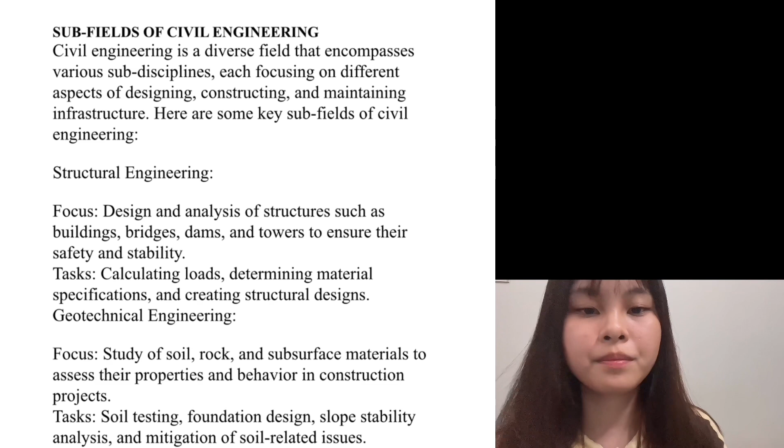Geotechnical engineering focuses on the study of soil, rock, and subsurface material to assess their properties and behavior in construction projects. Transportation engineering focuses on planning, designing, and operating transportation systems including roads, highways, railways, and airports. Water resources engineering focuses on management of water resources, including water supply, drainage, flood control, and irrigation.

Environmental engineering focuses on addressing environmental issues related to construction and infrastructure projects. Construction engineering and management focuses on project management and supervision of construction projects from inception to completion.

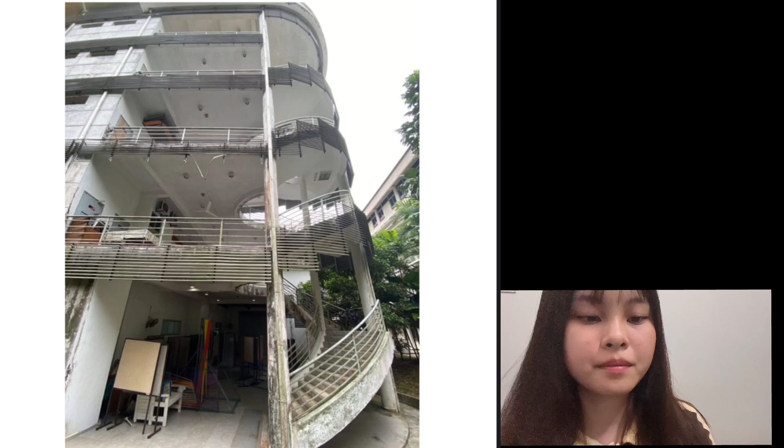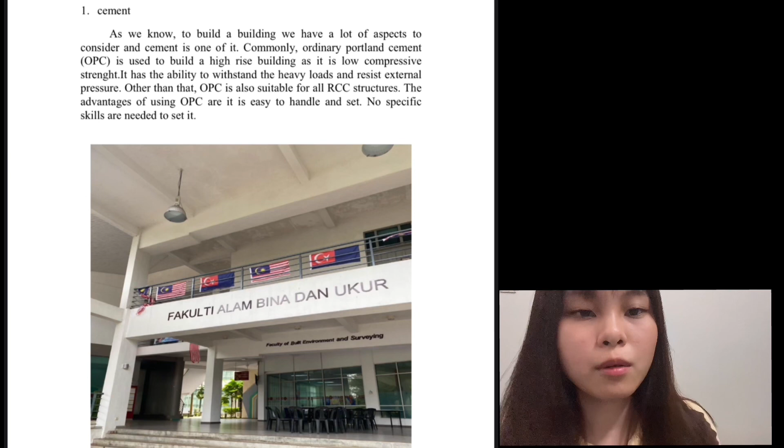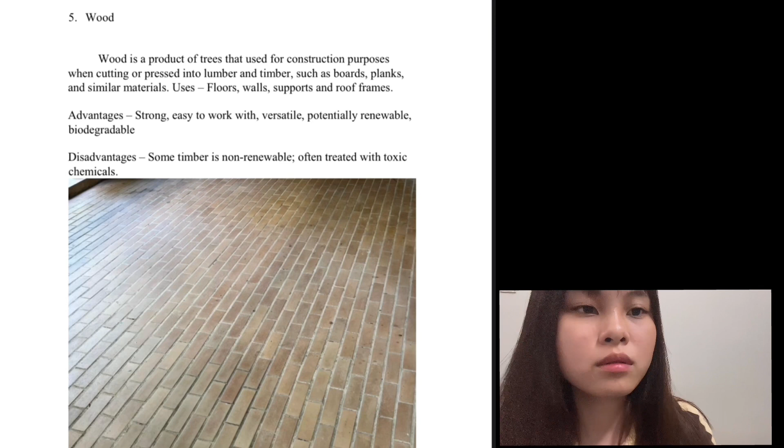The materials used in FABU are OPC (ordinary Portland cement), steel, clay type roof tiles, and glass. They also use wood for the floor, wall support, and door.

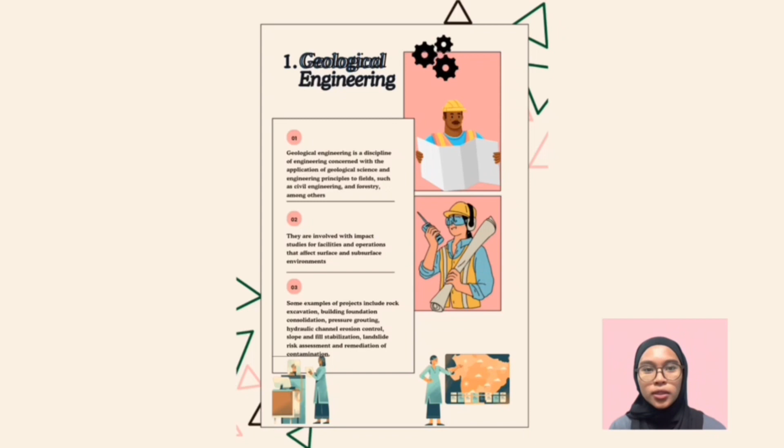For geological engineering, they are involved with impact studies for facilities and operations that affect the surface and subsurface environment, for example rock excavation, landslide risk assessment, and slope and fill stabilization. There are several problems they face in their projects, such as high rainfall and erosion, material durability, expansive soil, and tropical cyclones and wind loads.

For the second issue, geotechnical engineering, for your information, geotechnical engineering uses the principles of soil mechanics and rock mechanics to solve engineering problems. The problems related to geotechnical engineering include high temperature and humidity, seasonal rainfall and monsoons, aggressive soil and corrosion, and high groundwater table.

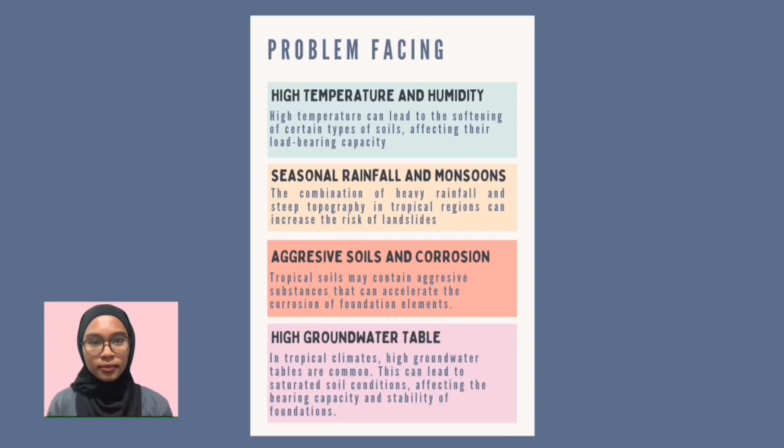The last issue is transportation engineering. Transportation engineering is a branch of civil engineering that involves the planning, design, operation, and maintenance of transportation systems to help build smart, safe, and livable communities. This field commonly faces problems such as heavy rainfall and flooding, hot and humid climate, cyclic loading from heavy rain and drying conditions, and resilience to extreme weather events.

Assalamualaikum everyone. Today I'm going to present to you about average water consumption and energy consumption during the 5 daily prayers: Subuh, Zohor, Asar, Maghrib, and Isha. With groups of people numbering 20, 25, 30, 50, and 50, we get a total of 175 people in a day.

In September we have 2,800 within 16 days, and we have 3,150 within 18 days, and we have 3,150 in November within 18 days.

Then the data for water consumption in Surau over 3 months: in month 9 we get a water consumption of 14 meter cube, amounting to 8 ringgit 10 cents; in month 10 we get 20 meter cube for water consumption, amounting to 11 ringgit 60 cents; and in month 11 we have 16 meter cube, amounting to 9 ringgit 30 cents.

Summing up the water consumption, we get 50 meter cube, and the total amount is 29 ringgit. So the water consumption per month is 16.67 meter cube per month, using the formula of total water usage over total number of months, giving 50 meter cube over 3 months.

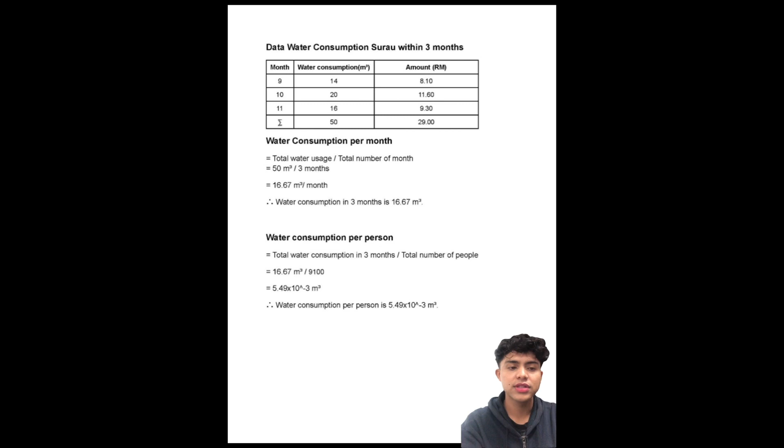The water consumption per person is total water consumption over 3 months divided by the total number of people, and we get 5.49 times 10 to the power negative 3.

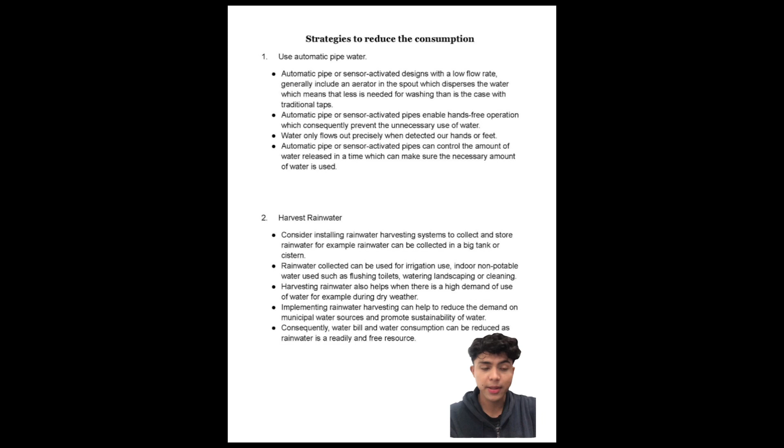There are strategies to reduce consumption. First, use automated water pipes. Consider installing a rainwater harvesting system to collect and store rainwater; for example, rainwater can be collected in a big tank or cistern. Third, through education, increase awareness of water conservation by organizing campaigns or talks regularly to teach people the correct ways and importance of reducing water consumption.

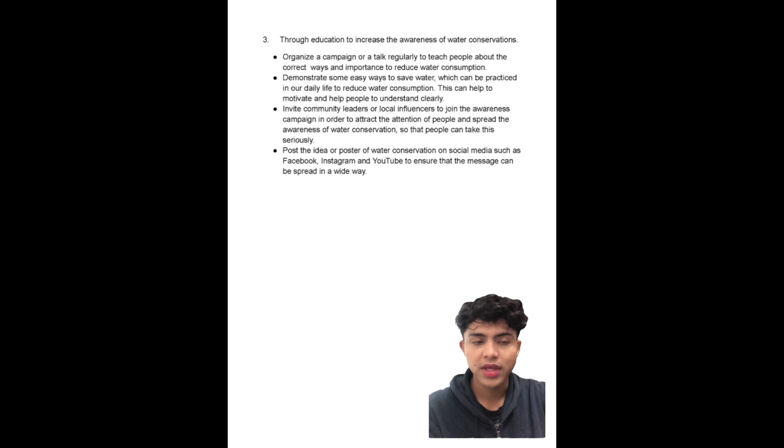The data consumption within 3 months, we have monthly figures. For energy consumption: month 9 we have 1064 kilowatt, and the amount is 594.51 ringgit. Month 10 we have 1258 kilowatt, and we have 701.30 ringgit. For month 11 we have 1236 kilowatt, and we have 689.81 ringgit. When we sum up the energy consumption, we get 3558 kilowatt and 1985.62 ringgit.

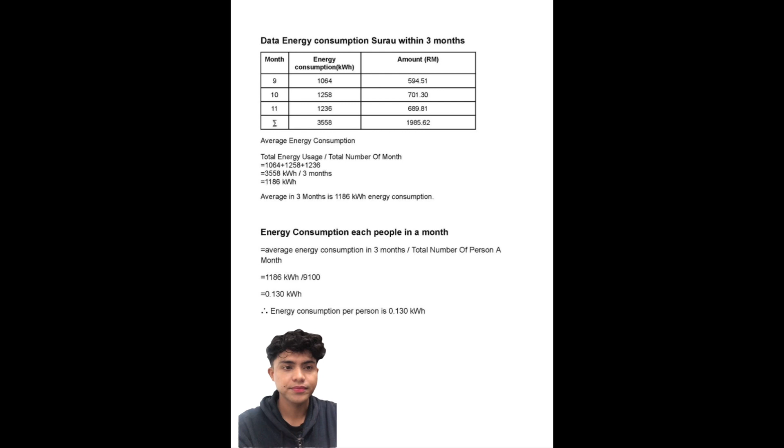So the average consumption we get is 1186 kilowatt. Energy consumption of each person in a month, we get 0.130 kilowatt. In Surau B, for the 5 prayers - Subuh, Zuhur, Asar, Maghrib, Isha - we have 15, 20, 25, 35, and 35.

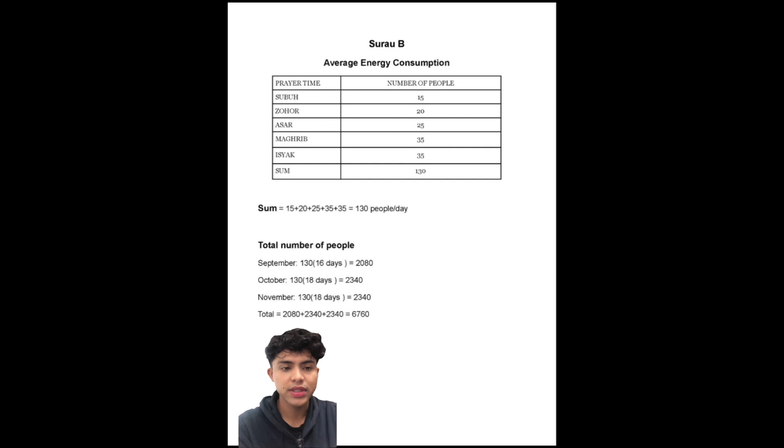When we sum up, we have 130 people in a day. So in September, we have 2,080 people within 16 days. And in October, we have 2,340 people within 18 days. And in November, we have 2,340 people in 18 days. So the total is 6,760.

So in month 9 we get 704 kilowatt, and the amount is 375 ringgit 9 cents. And in month 10 we have 707 kilowatt with 376 ringgit 74 cents. And in month 11 we have 672 kilowatt, and we get the amount of 357 ringgit 78 cents. But when we sum up all the energy consumption, we get 2,083, and the amount is 1,109.61 ringgit. So the average energy consumption across the months, we get 694.33 kilowatt.

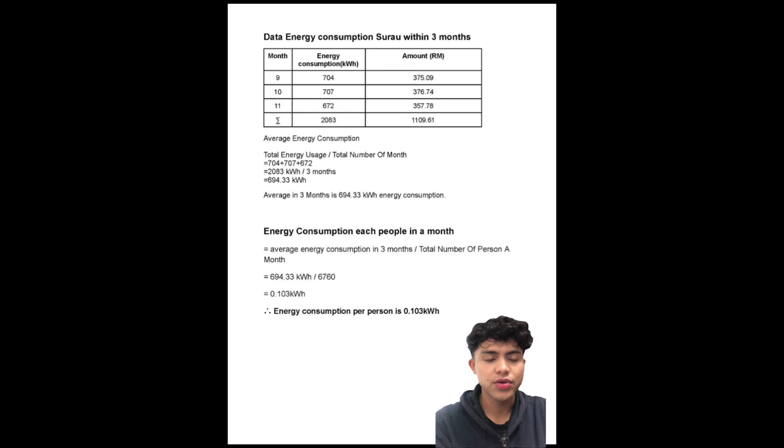So the energy consumption for each person in a month, we get 0.103 kilowatt. So a way to save is by using energy saving appliances.

There are energy saving appliances that are star rated by the manufacturing company, which use less energy compared to non-star rated appliances. This method can prevent the appliance from overusing energy.

Ventilate your house. By ventilating your house you can keep your house cooler, which can reduce the use of air conditioners. This significantly reduces the consumption of energy.

By optimizing light usage - light usage contributes the most to energy consumption - always switch off the lights when you are not using them and only turn them on when it is necessary.

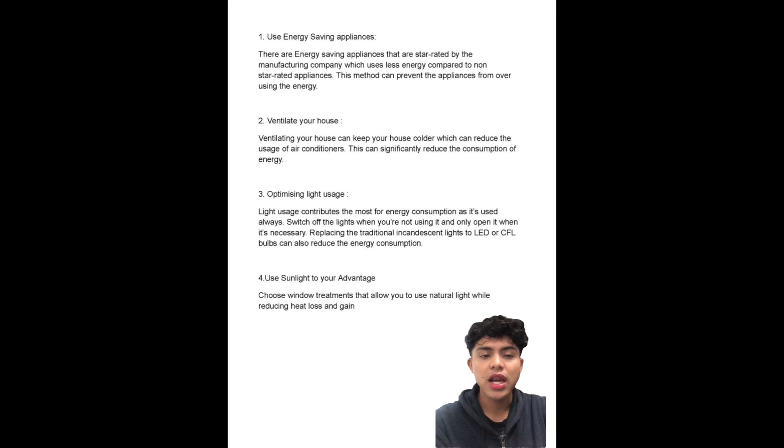Replacing traditional incandescent lights with LED or CFL bulbs can also reduce energy consumption. Lastly, use sunlight to your advantage. Choose window treatments that allow you to use natural light while reducing heat loss and gain.

Thank you. Climate change is primarily caused by human activity that releases greenhouse gas into the atmosphere. Here are some of the main factors contributing to climate change.

First is burning of fossil fuel - the burning of coal, oil and natural gas for energy and transportation releases carbon dioxide into the atmosphere. Next is deforestation - the cutting down or burning of forests, mainly in tropical regions, reduces the Earth's capacity to absorb carbon dioxide through photosynthesis.

Next is agriculture, particularly rice cultivation and livestock farming. Cattle in particular release significant amounts of methane. Industrial processes release various greenhouse gases, including carbon dioxide and methane, during manufacturing processes, chemical production and waste management.

Next is land use change, such as urbanization and construction, which can lead to the release of stored carbon in soil and vegetation. Lastly is waste management - improper disposal and decomposition of waste in landfills produces methane and carbon dioxide.

Climate change has brought impact on water resource management and coastal areas, and the impact is closely tied to several sustainable development goals outlined by the United Nations.

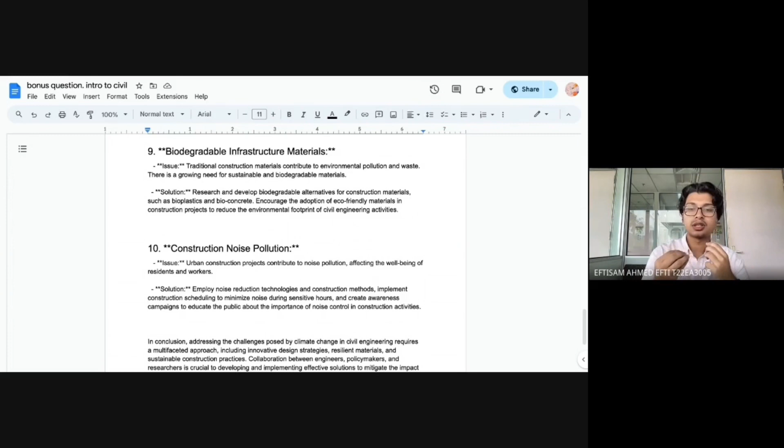The solution to this can be employing noise reduction technologies and construction methods, implementing construction scheduling to minimize noise during sensitive hours, and monitoring vibration and noise patterns for construction, making sure there are no hospitals, school areas, or religious areas around construction sites, and monitoring properly.

In conclusion, addressing the challenges posed by climate change in civil engineering requires a multifaceted approach, including innovative designs, strategies, resilient materials, and sustainable construction practices. Collaboration with engineers, policymakers, and researchers is crucial to developing and implementing effective solutions to mitigate the impact of climate change on the built environment. So that is the imposed question and the probable solution presented by our group.